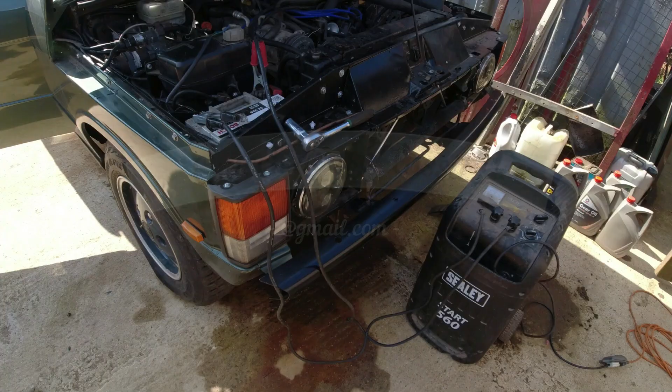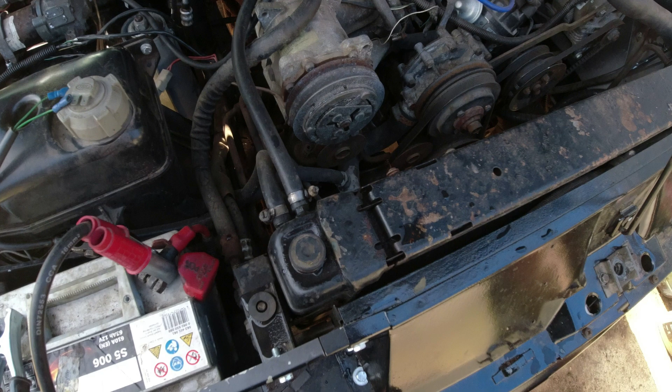Right, it's time to start this thing up. So I have routed all the fuel lines through. I have connected all the electrics up. I have topped the cooling system up with cold water. Cold water, plain water. Really, I'm just charging the battery now. Lobbed a fair few gallons of fuel into the boot. To the tank.

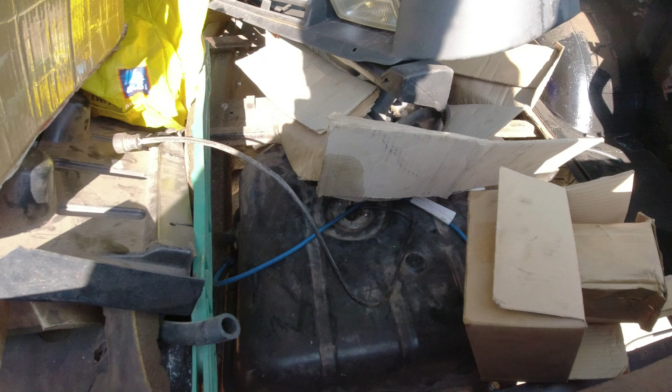That's all gone in. It's all connected up. I'll just check I connected up the electrics. Tank is not connected yet. We'll need to do that. So it looks like I've connected up the level sensor but not the pump. That's not too much of a problem. And then really, I think what I'm probably going to do then is, well, I'll show you, but I'm going to bypass the relay so that we send 12 volts direct to the pump and we'll get fuel running through the rail.

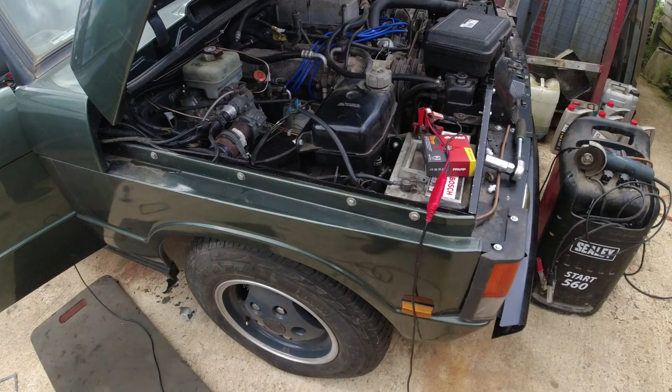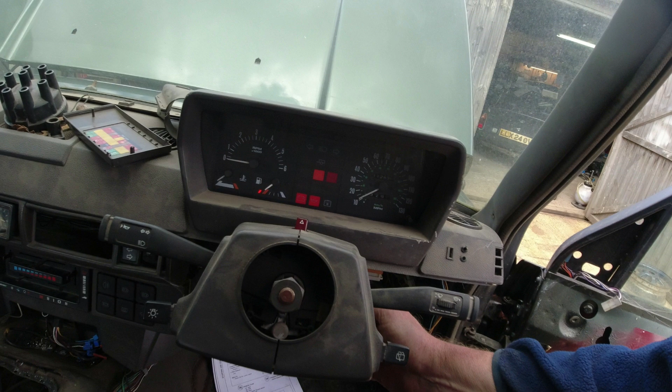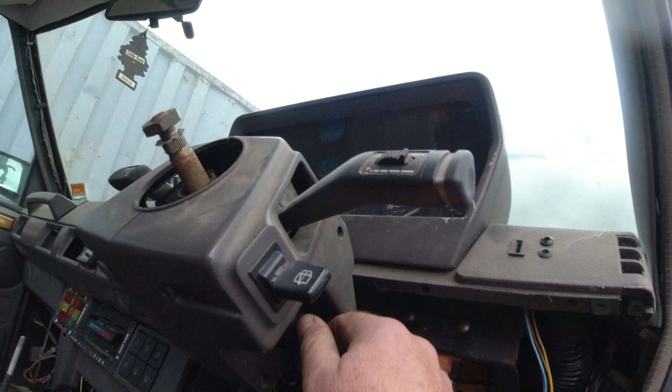And we'll see if we've got any leaks. Well, as is to be predicted, we're having a few challenges. Not horrendous challenges, but challenges all the same. So the ignition goes on. Starter motor's not working, and when I find the starter relay, oh hang on, that's it. Let's put the starter relay back in again for this particular test, Richard, shall we? So, pop the starter relay back in, silly arse, and we're getting no start option.

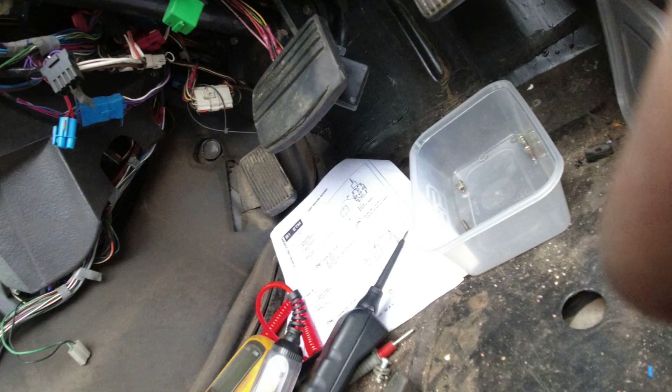So the way that the starter relay will work is it will take a feed, and I don't know if we can do this, we'll do it with the tripod. So we've got ignition on. Let's take out, and then what I'll do is I'll bridge the input and the output, and the starter should turn. Right, so the starter's turning, so we know that the supply is good.

What we then do is we look at one of these wires will be from the, so that wire, if I go from that wire, from the ignition switch, I could test also the ignition switch circuit. So if I go to that one there, I think that will work. Right, so we know the ignition switch is good. So I'm suspecting what's happening here is the relay is not getting an earth. And the relay earth, in this particular case, will be to the inhibit switch on the gearbox.

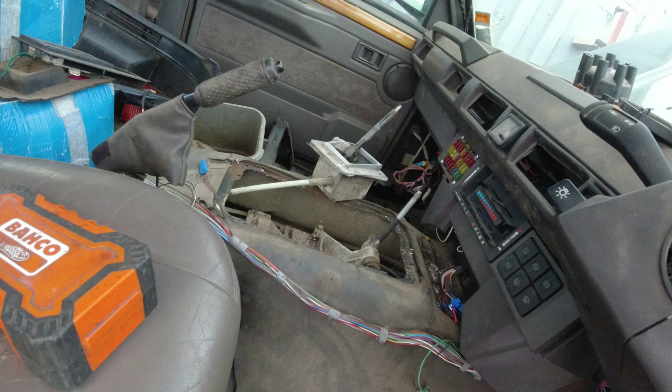Which is why the top cover's out on the gearbox, because the inhibit switch connector is just there and it actually sits on the front of the gearbox. And for the sake of drilling out a couple of really gnarly looking pop rivets, I thought I'd take it apart and see if we couldn't work out what was going on. Now, the same switch, I understand, for inhibit also does reverse. So if I go into reverse, I'm not going to attempt to start, of course, and ignition on.

Yeah, we've got reverse lights. Also got brake lights. Or are they lights? No, they're brake lights. Why's the brake lights on? Let's reset the brake light plunger. Right, I should have reset that. Brake lights are still on, good. Right, don't worry about brake lights.

We know reverse lights are working, so I can then go back and out of reverse, and we should be reverse lights off, which we are. Don't worry about brake lights. It's about to do that in a minute. But we have no start. So what I'll do next, let me make up.

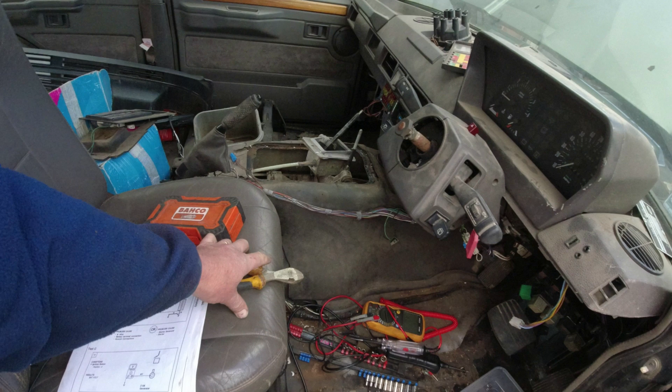So on the relay position, and this is the start relay here, this black and orange wire is the wire on the circuit. I know this is 1993, but it's not that much different. The key differences are in the power distribution. If I go, here we are. So we have got ignition switch, crank fuse, starter solenoid relay. Comes in on the white and red.

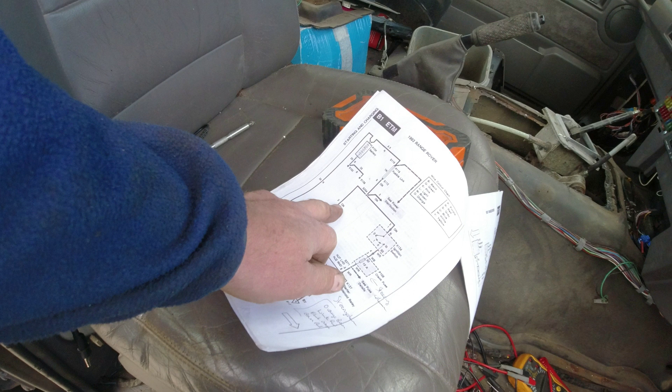Black and orange will be the earth side. Orange and brown, and I think it's just brown and orange on this particular case, and brown and red. So brown and red goes from this relay through to the starter motor. So when I connect that to that, does that make any sense?

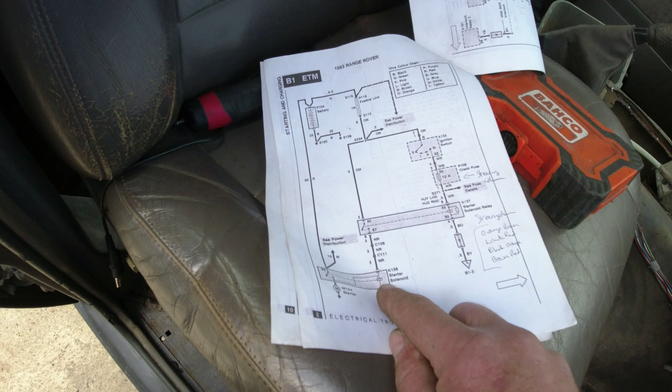So when I connect this feed here, which is constantly live, on a later car it'll be via a fusible link, but on this car it's from a terminal post, goes through to the brown and red, the starter turns. Okay, if I connect that one to that one, and then just turn the key to the start position, the starter turns. I don't want to do it for too long because I'll overload the ignition switch, which is why the relay's in here.

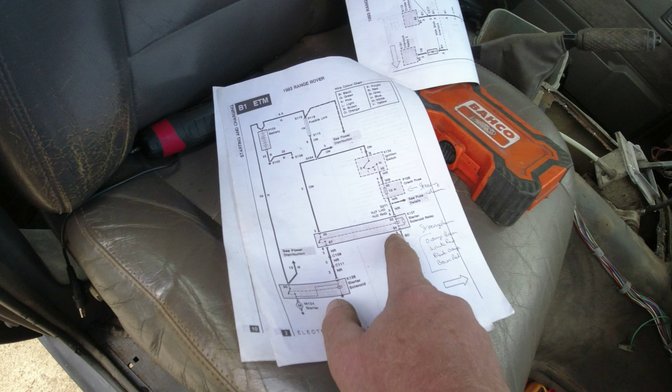So now, by all this rationale, if I was to provide an earth for the relay and the circuit works, we know it's something to do with this black and yellow wire, or black and orange, black and yellow wire. So let's get that set up. So on the back of the block here, hardwired a relay in, and we have now got an ignition system. The problem is I don't yet have a spark. If I don't have a spark, then I'm not going to have a feed to the fuel pump.

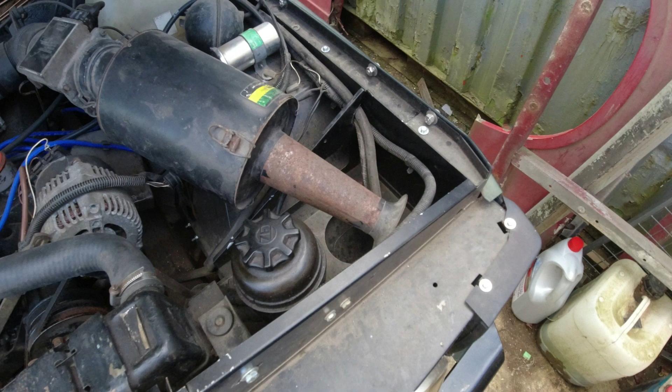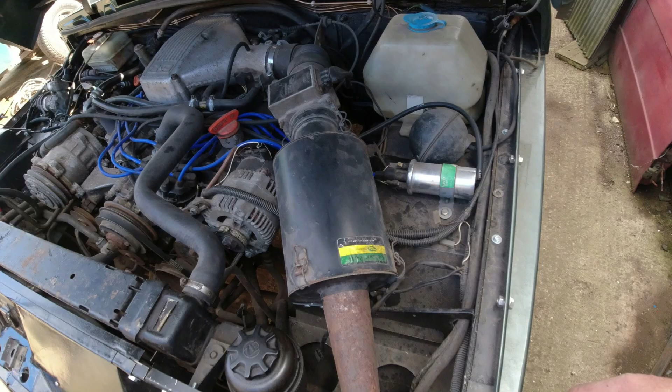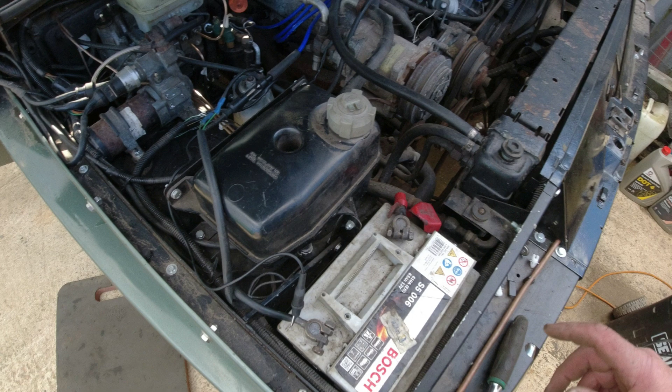So I'm going to rig up a test rig. So we've got ignition amplifier and distributor here. If I put a jump wire on the back of the starter solenoid, which I can get up to here, I can crank the engine while it's in here, and then I can, in theory, crank the engine while I give voltage to the ignition coil and see if we can't get it working.

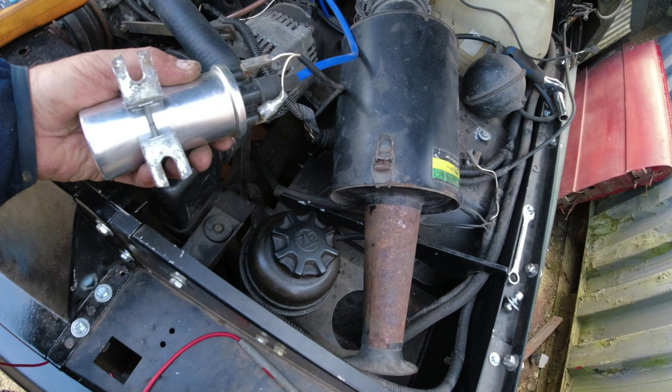Well, that turned out to be a relatively simple problem. The negative signal wire to the ignition coil was incorrect. I need to be sure that these wires are actually on the right terminals, because I've never actually been near this thing on the ignition circuit. And it did have some fairly extensive problems with the ignition beforehand.

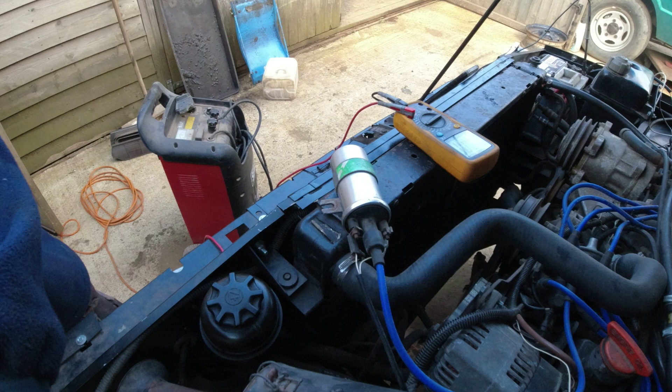So let us disconnect the positive terminal and check we've got voltage to this with the ignition turned on. Ignition on. Ignition's on, and this should have voltage. This is just the plain white wire, and it has. Well, there's no voltage to that. Right, I'm going to turn the ignition off before I put that back on again, otherwise I'll risk giving myself a shock. So we can reconnect that back up to the ignition coil. So it had a poor signal wire from the circuit that comes from the ignition amplifier.

So now, if I run this lot through here, I'm just going to put the ignition coil back over here so it's in a reasonably safe place for it to sit.

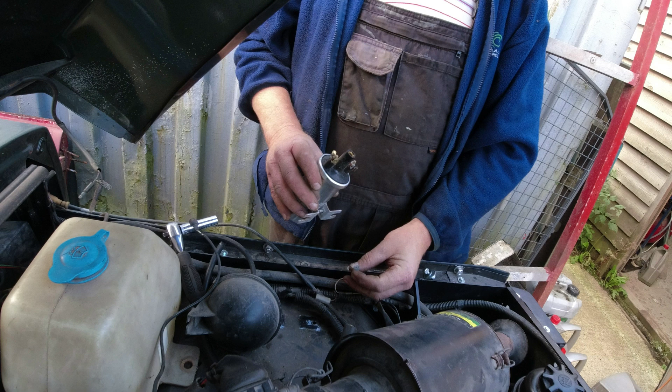Oh, God help us. Back's starting to hurt. Your back's saying, huh, fucking around in this still, are you? So, where are we? There we are.

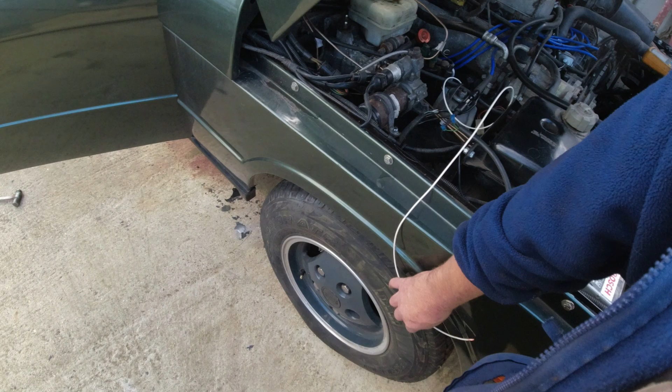So you've got a female spade connector and a male spade connector. I'm not worrying about the fuel feed at the moment. I don't actually want this thing to fire up, but we could actually test that the fuel is coming through, which is that wire there. So that can sit there now. And now, ignition on. Right, ignition's on. You come over here, and we've got the wire, and we've got the spark.

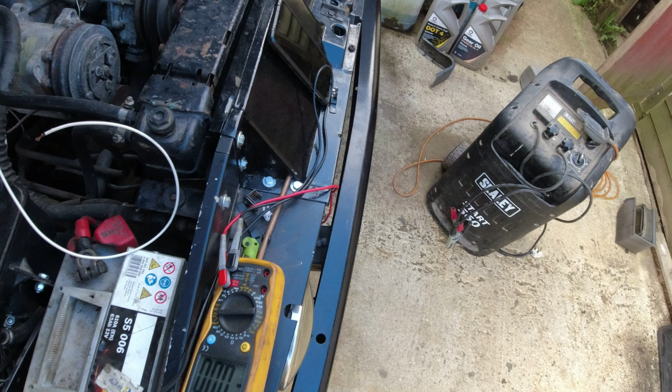I'll be honest, I wasn't expecting that. Throttle's jammed open. Right, throttle's now better. Let's wind the throttle so the throttle is loose, because that's why it revved like fuck then. It started. Right, ignition off. Let's reconnect that spark plug lead. Now, this started up using my dummy wire.

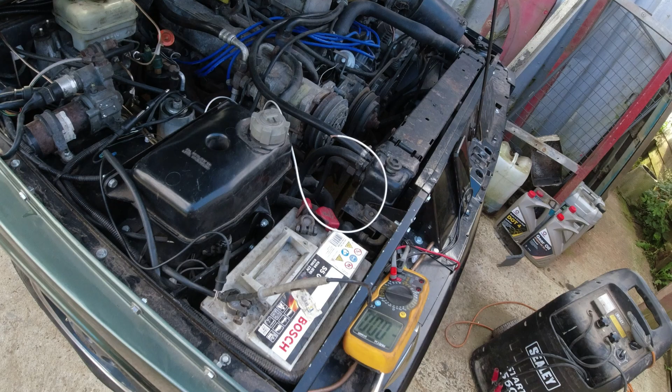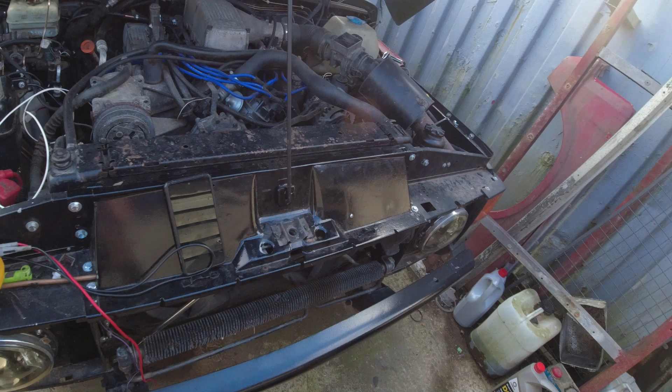Now, before it gets all too hot down there, knowing it starts now, and knowing that I'm getting a spark off it, because this thing has always been a complete bastard to start. And then it's been in my yard for 3 years, and I think we might have found that it was a dodgy connection to the ignition coil. I know the timing was out on this as well, because when the car first came in, I identified that the distributor was a tooth out.

Right, so let's let that cool down again, and then connect up the starter solenoid again. We've still got the problem with the inhibit switch. Now, what am I going to do with that? Tell you what I'm going to do.

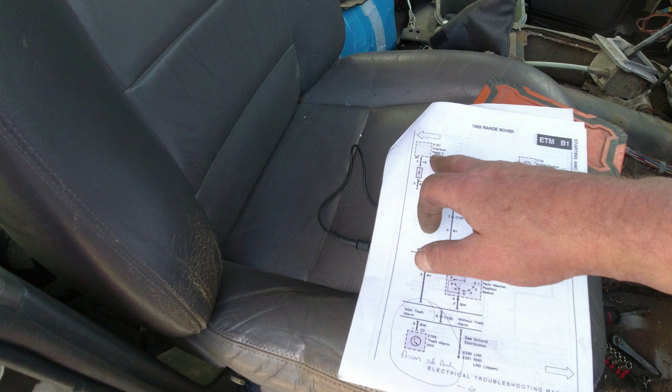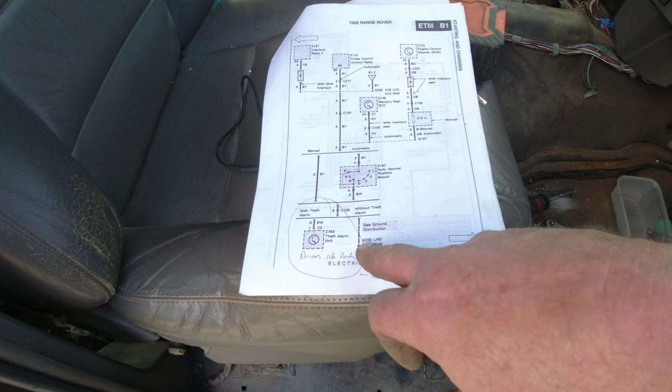We've got this black and yellow wire, so I need to find out what the interlock relay is first and foremost. I'm going to do that in the book tonight, and whether that is even applicable to this age of car, because that's the position switch, which is over there on the side of the gearbox, and it's a black and yellow wire which ultimately will go through to ground distribution. So when we're in park or neutral, it goes through to ground, and that's how the relay gets its earth. But you'll notice this ominous word here as well.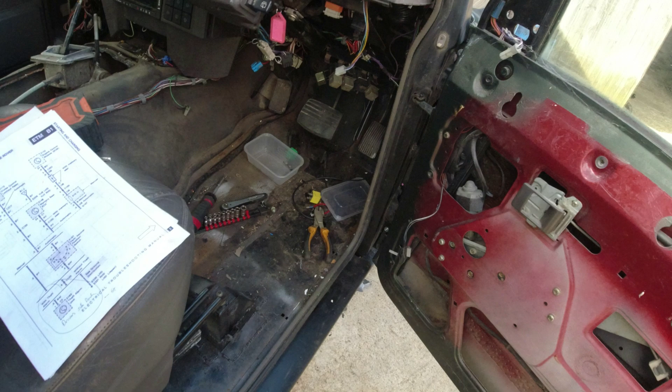Now, there was an alarm on this car, which I've removed all the wiring from, but quite why it's not providing an earth, I'm going to guess it's going to be the inhibit switch to start off with. It started. Right, so thank you, Mr. White Bit of Wire. Shan't be needing your services much more.

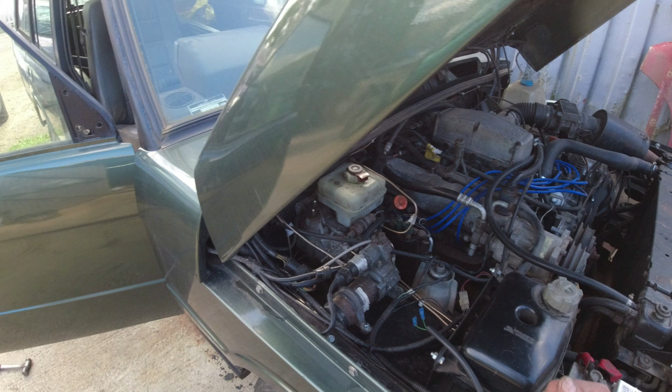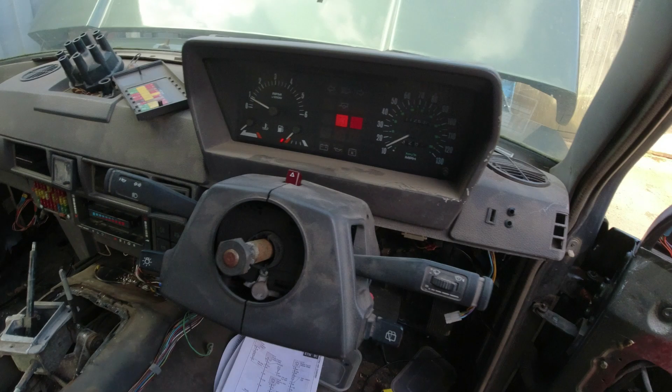Now, reconnected up the starter solenoid wire. That's all I've done. When it starts, just check the oil light did come on. Yep. We might have a blow on the exhaust. Radiator low. A blow on the exhaust. There's definitely a blow on the exhaust. Just about hear it.

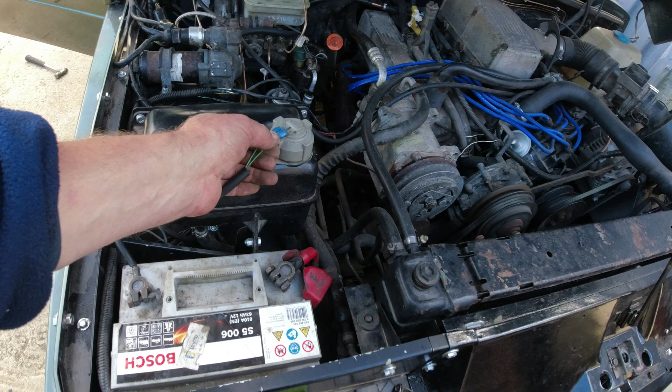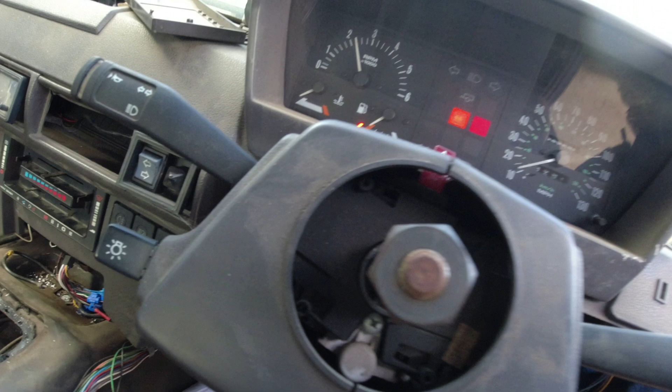If I reconnect this now. And this is the ignition timing. It's the next thing. That should now extinguish that. Yeah, that's done that. Oh, I might have to video this for the customer.

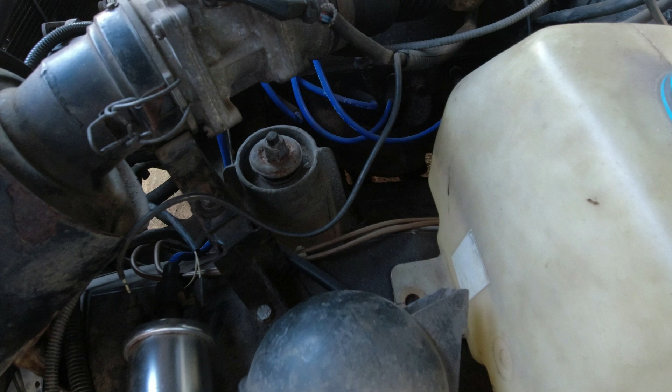I'll edit this chunk of video and I'll extract the bit with the first cold start, which I'll send over to the customer as well, but at least he gets the It Lives video which I like to do to all of my customers. It's alive! I don't know what is leaking down there though. I'll have to get the torch down there and just check that's not oil coming out of the... No, I just think it's all sorts of shit all over the place. I'll work out where the exhaust is blowing as well, because that's going to obviously need fixing. That's quite noisy at the moment.

Right, I've set the ignition timing. Disappointingly, the EFI warning light, the big orange exclamation symbol, came up on the dash, so I turned it off. Now, what I really want to do is to see if this thing moves. It'd be nice if it does. If I could turn it around then. You can go over, where can you go? You're going to have to go over here, I'm afraid, because otherwise the sun will be shining straight at you. You can go there. Will it move? Oh my God.

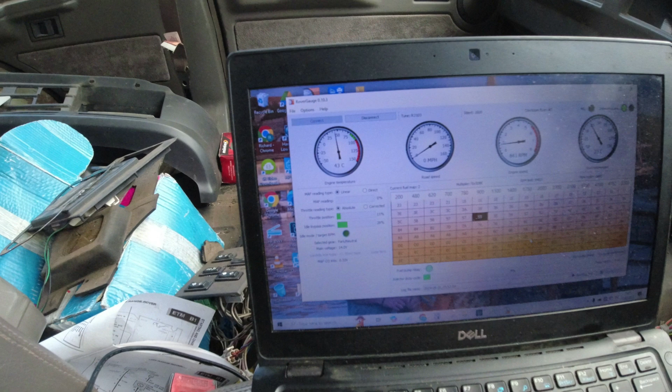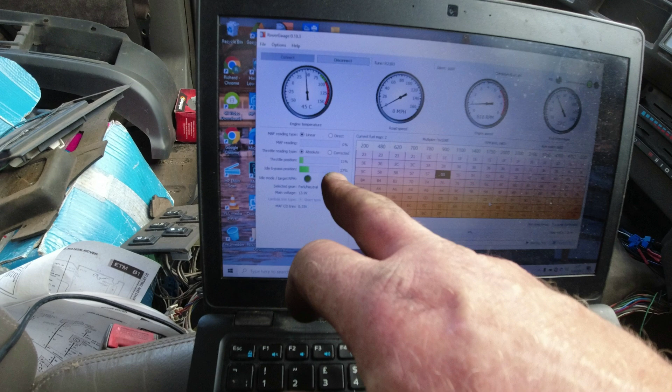Right, there's no warning light up yet, but what I'm finding interesting here is engine temperature's good, fuel map is okay, idle duty cycle's okay, the bypass position is about right, there is no MAF reading, which is weird. Why is there no MAF reading at all? So we've got two problems here. MAF reading. Oh no, hang on a sec, we'll go direct now, we're getting 34%, so I'll just double check that against, I must have clicked off direct there.

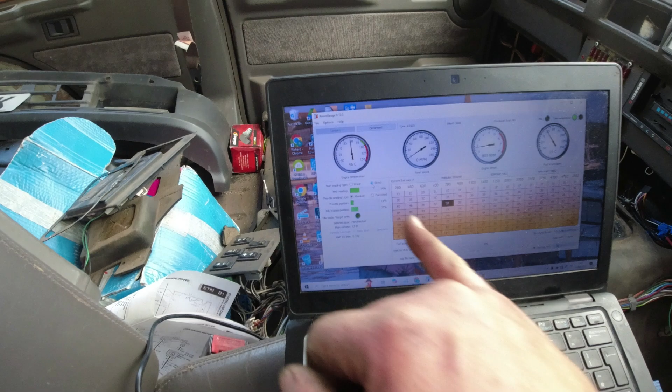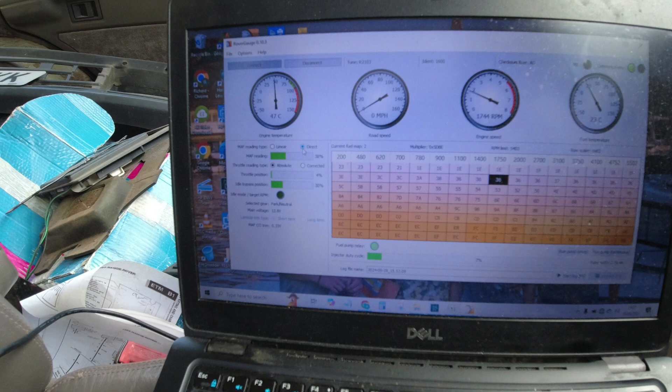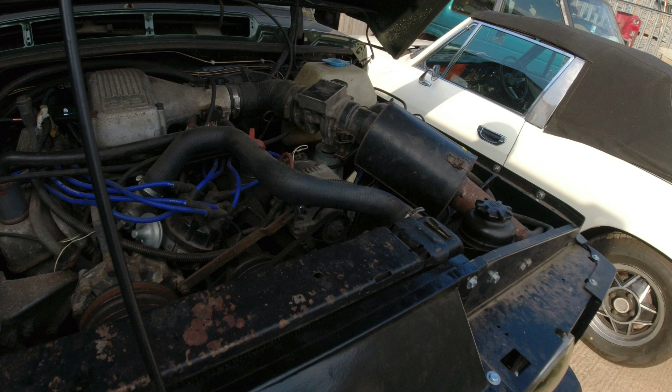What's worrying though is throttle position sensor is all over the place. So the throttle position sensor does not respond correctly to the throttle position. Now let's turn off for a second. So the throttle position sensor is that chappy right there, and there's the connector. I suspect it's not happy. So first and foremost, I'll try a different throttle position sensor, and if we can prove it's the throttle position sensor, then I'll just order another one.

Airflow meter appears to be okay. I'll just double check that against the baseline. But no throttle position sensor is not going to help it, because as you're driving then, the ECU is not going to be able to detect how far open the throttle is, but it will be picking up a signal on the increased airflow through the airflow meter. The two won't correlate, and so then the ECU warning will come on, which I think is what's happened. So let me get another throttle position sensor.

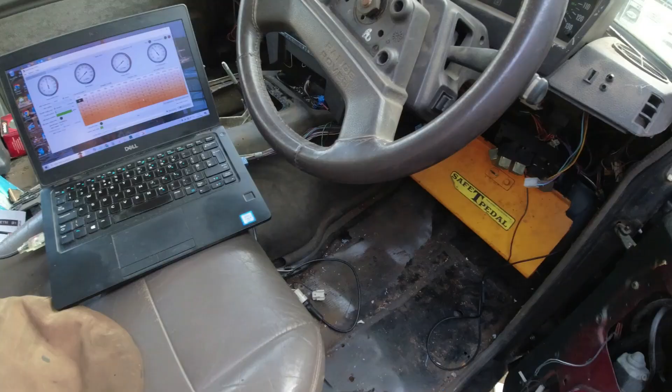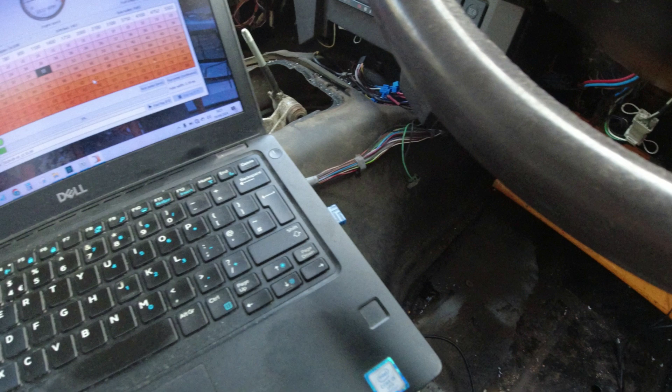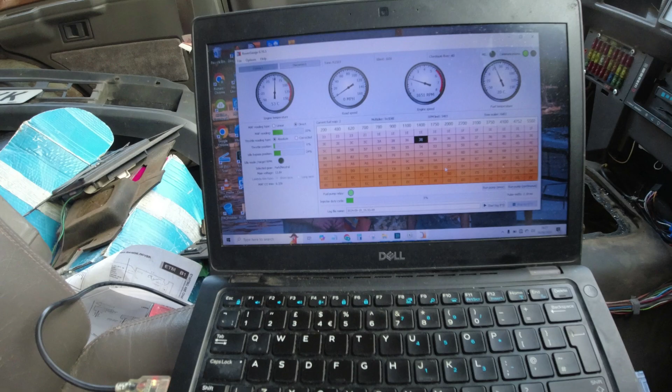This is the throttle position sensor out of my car, and now ignition on, and if I just push the throttle down to halfway. Let's turn the ignition on first, Richard. Right, ignition's on, and now we'll push the throttle pedal down halfway and then to the bottom and then halfway and then let go. That's all good. Well, it already sounds a lot happier. Already. Throttle response is instant. Right, so throttle position sensor's fucked then.

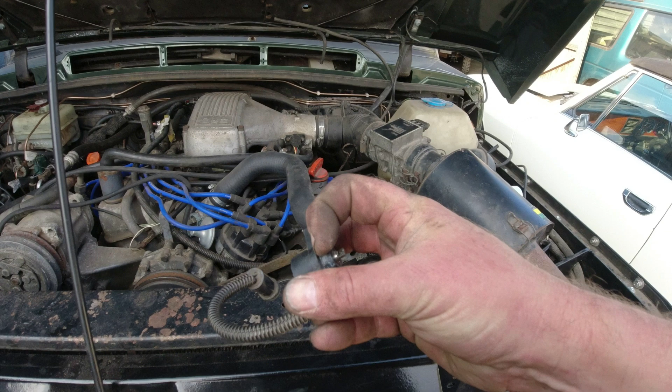So let me repeat that test now, because I know the throttle position sensor I took off the car was not behaving, but sometimes just breaking and remaking the connector will fix it. There was also an awful lot of crud and white powder around this. Now the throttle position sensor itself, it takes direct linkage off the end of the throttle shaft that goes through the intake to the plenum and turns this, which then sends a signal back down these wires to the ECU. So let me plug this one back in again and see what happens.

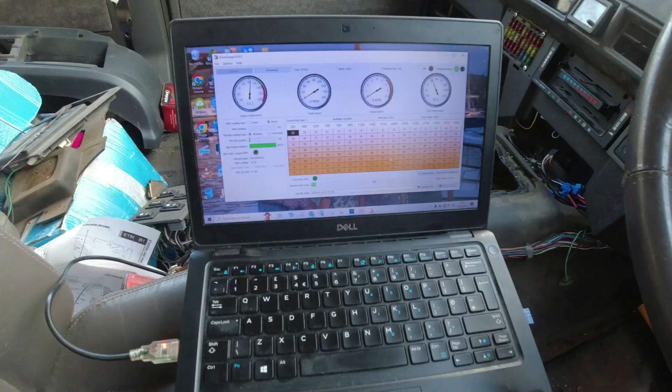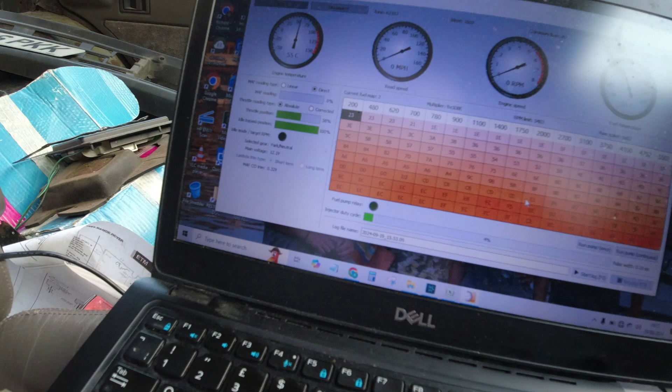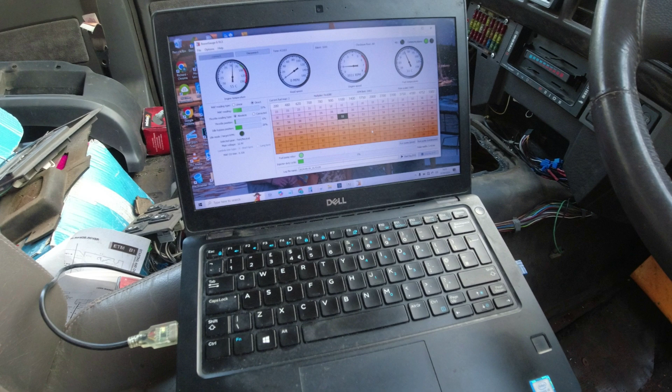Right, so the customer's unit put back on the car now, and well, that's good news. It's working now. What's it like maximum? So maximum 95%, minimum 4%. Is that 4%? 6%. I'm wearing the wrong glasses. Half throttle, 50%. Right, so it could just have been that connection. Except it doesn't sound anywhere near as happy.

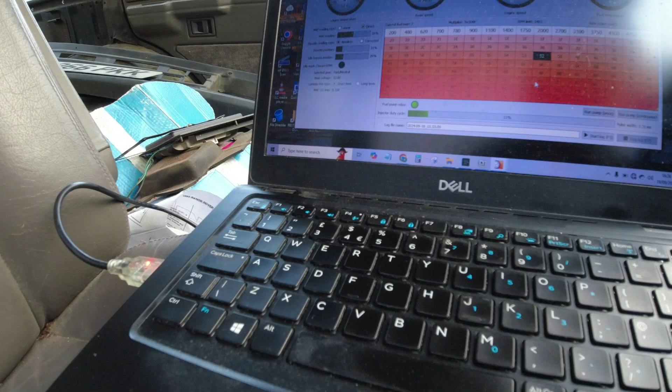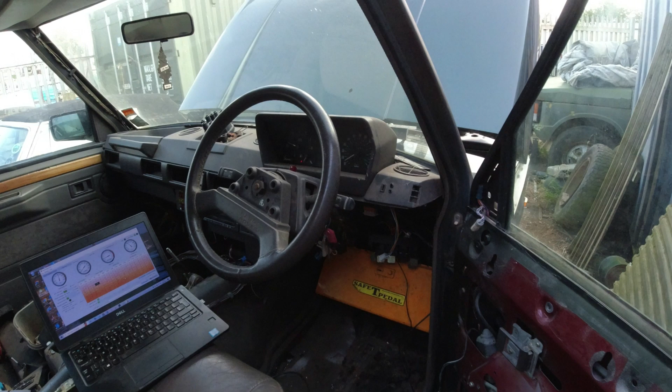It's responding better. I'm sure it was sounding smoother on mine. Now the airflow meter on this is 33% and the bypass position 23%. So let's go and check those against the documentation.

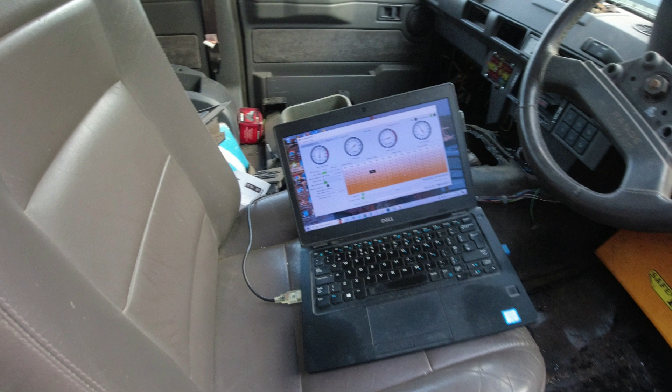Interestingly, the park neutral select appears to be working. So we just double check that. In fact, I can't because I've got the pedal box and everything in there. I want to really just double check that the selector is working. Then I know the inhibit switch is working, and I know that the problem lies elsewhere when it comes to the issue that we've got with it not starting. Right, okay, that's good news anyway.

It's better, but it's not better, if you get my drift. That needs to go back on my car again. I think now probably just breaking and remaking that connection may have fixed the problem. We'll see.

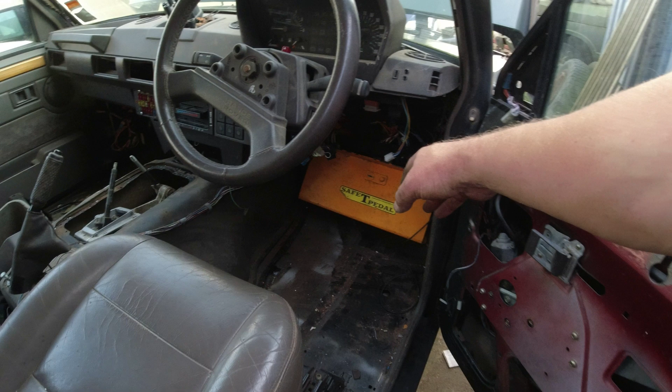And I completely forgot to video it, but took the Safe-T-Pedal lock off, got in the car, started it up with the Rover gauge on, looking at the park neutral selection, moved it into reverse, and it said drive/reverse. Into neutral, it said park/neutral. Into drive, it then said drive/reverse. So the inhibit switch on the gearbox is good, which is great news because they're bloody expensive.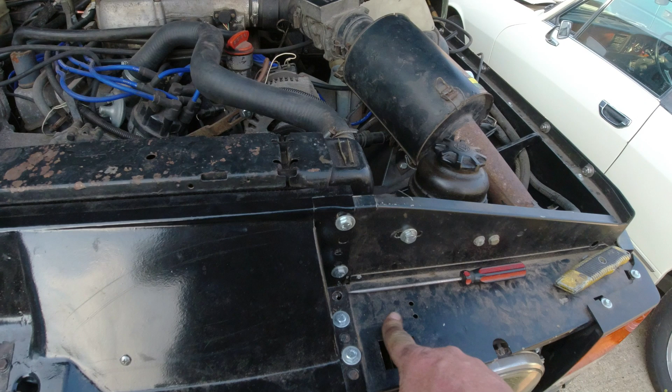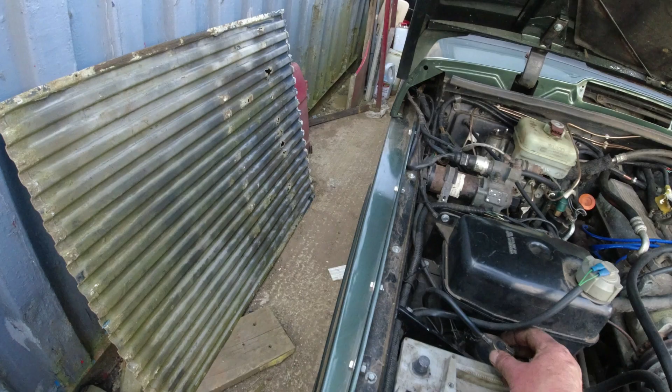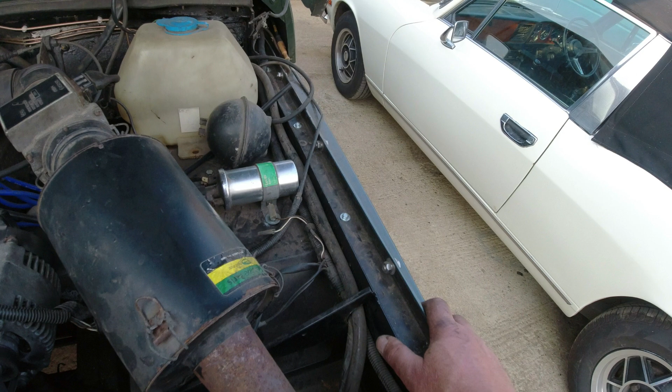So I think next thing on this really, I need to put the reinforcing piece that goes around here in, because that is nowhere near strong enough for that, and we really do not want the bonnet flying open. Now that's kind of done the key thing there. Quite pleased with that. These ignition coils, they're not great for these engines, by the way, folks. Really not great. Could do an awful lot better than that, but I thought that was a scratch then for a second, but it's not. It's a spider's web. Right.

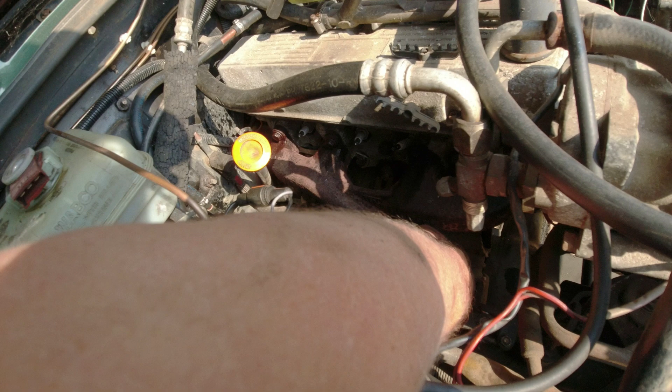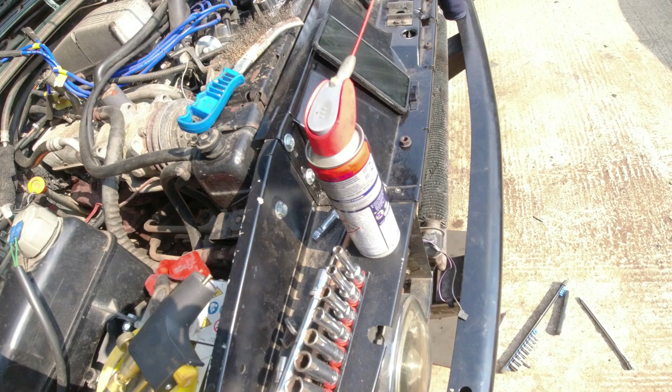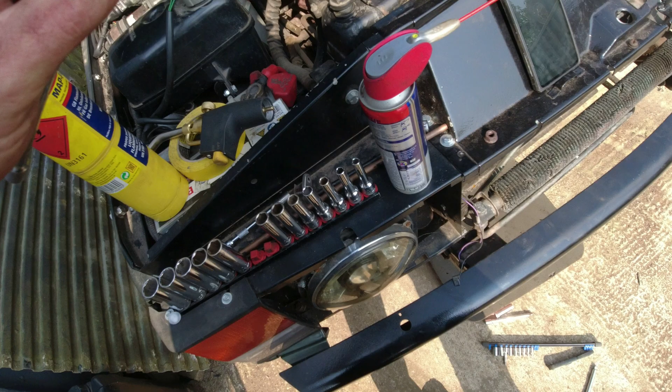Dealing with the exhaust blow on this. So had the engine running, and the blow I could really feel past this down bolt here, which is actually loose. Not only is it loose, but the stud's loose too. So I strongly suspect there's some ham-fisted gibbery going on here. Now, I managed to get one of the nuts undone. There's three of them. So someone's been in there relatively recently, because that's not that old a nut. And then the second one. Oh, cheers to that, chaps.

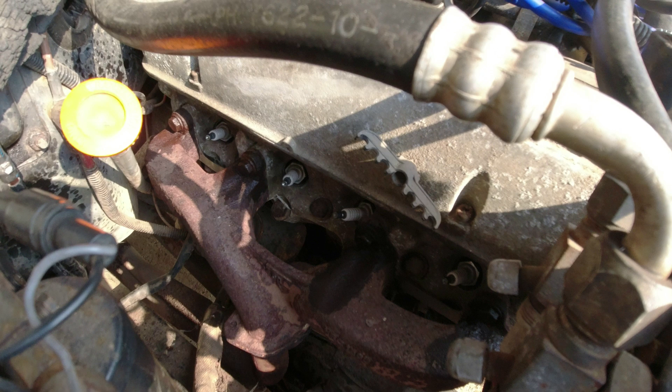Thanks a fucking bunch. So now we are into getting the manifolds off territory, which normally really would not be a problem. But, and I say a big but here, someone's not used the lock tabs on here. So I suspect they will almost certainly have used thread lock. I had this problem with Dale's car, tried to remove the tubular manifolds off his car. Every single bolt had been thread locked the entire depth of the thread.

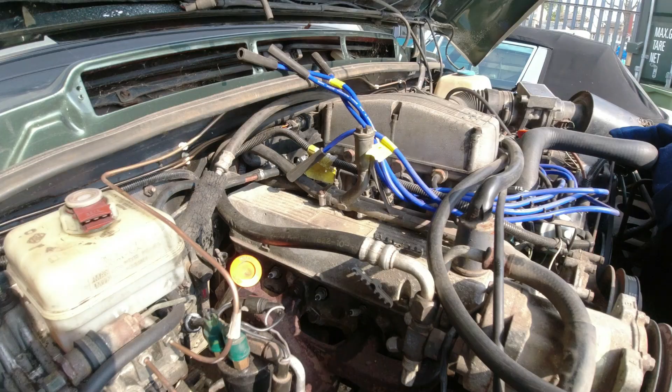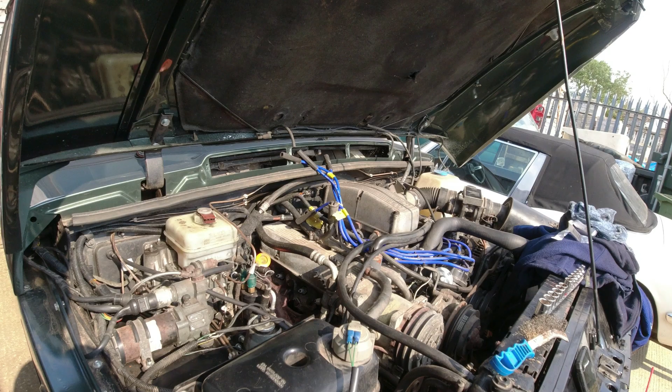So incredible amounts of heat were required, and I just could not get one out on this side on Dale's car, so that's going to be coming into the workshop for me to see if I can't drill the bolt out with the head in situ. But to be honest, it's probably going to be a head off job in order to get the fucking thing out. So yeah, I'm delighted about that.

Anyway, I'm not going to video this because my channel will surely be demonetised with the amount of profanity that is about to occur. It's a nice quiet day here on the estate. Nice, quite a pleasant day. September, middle of September.

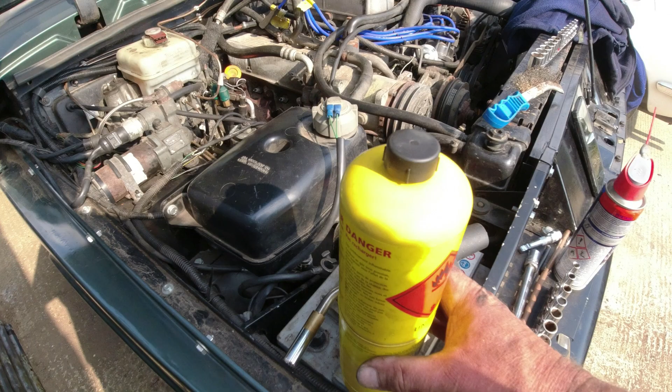I want this done. So I'm going to lob a bit of heat onto each of these bolts using the MAP gas and see if we can't melt any thread lock that is there. Now obviously the four top ones dead easy, the four bottom ones are going to be a bit more of a struggle. Once the manifold's off, then I can deal with the broken stud.

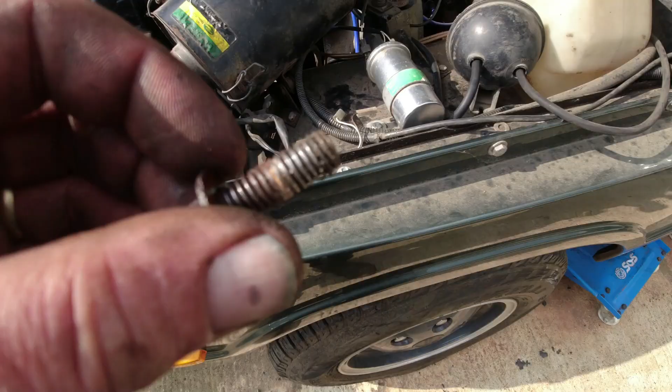Right, it's one out. A couple of observations. First and foremost, the thread is knackered on this. I don't know what sort of bolt it is. Secondly, thread locked up to the shank. You see the remains of it in the thread here.

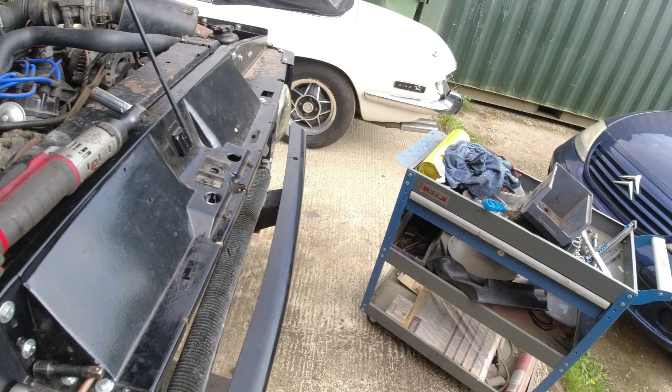There's a certain class of mechanic, be it amateur or otherwise, who just needs to be banned from working anywhere near threadlock. A dab on the threads, folks. A dab. Just the slightest dab. You don't need to dip the whole fucking thing into threadlock. And then when the threads look like that, it's probably time either to chase the thread out, you can see all the threadlock on the end there as well, or replace the bolt. You're doing no one any favours at all with that sort of fuckhousery.